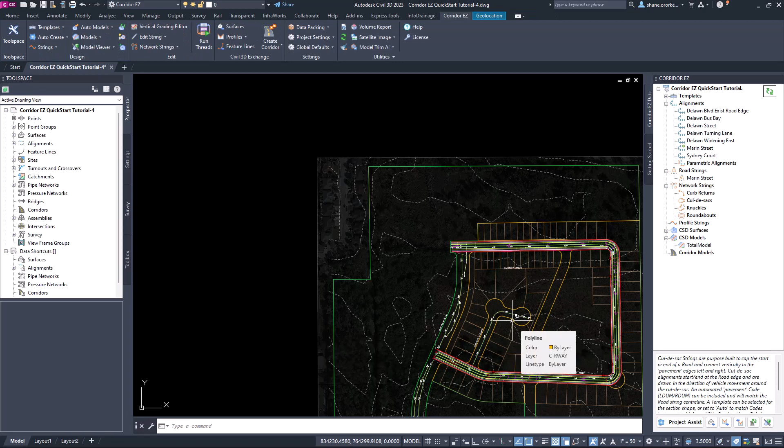From the tool space, you can create each road, curb return and other strings one at a time. You can also use the Project Assist command to intelligently assess all your alignments in the drawing, to suggest how you would like to use them in the design, and guide you through a workflow to create all of them in a single process.

To see how to create individual roads and road network objects singly, right-click on any center line and turn it into a road string. Strings behave like a single baseline corridor. The alignment drives the horizontal geometry, we create an initial best fit profile for the vertical geometry, and apply cross-sections for the design surface and volumes.

The sections initially come from your templates. All you need to do in the Create form is to select the starting template, the sample surface for daylighting and volumes, and how frequently you would like to calculate sections.

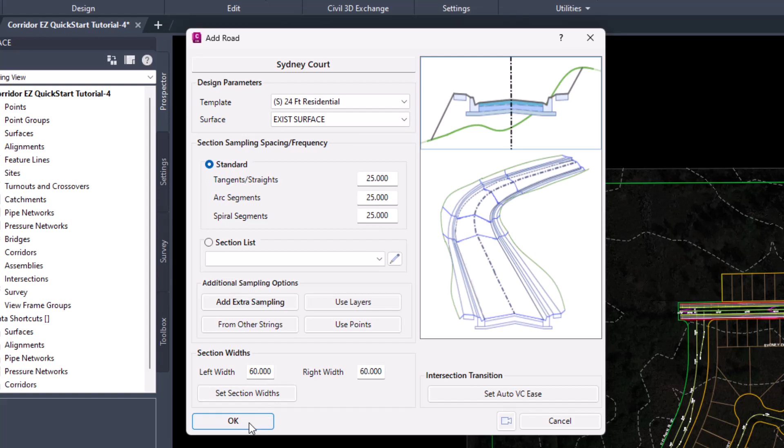Once created, a floating window displays your design profile. This window can be positioned anywhere on your monitors, so you can design your profile while you review the full AutoCAD model window. You can right-click anywhere in this window to display a cross-section at that particular station, updating dynamically as you edit the profile.

Plan line work and a surface model can be created and update as you design in this window. We'll revisit this interface and the integration with Civil 3D profiles and profile views in a following video.

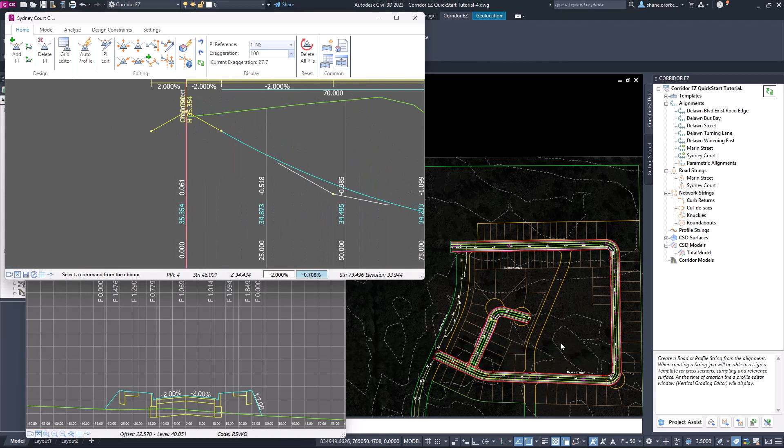You can repeat this road string creation process on a second road to form an intersection. Whether a crossroad or a T-intersection, the side road will continuously update to adopt the cross-section of the main road. To add curb returns to an intersection, simply right-click on the curb return object group in the tool space.

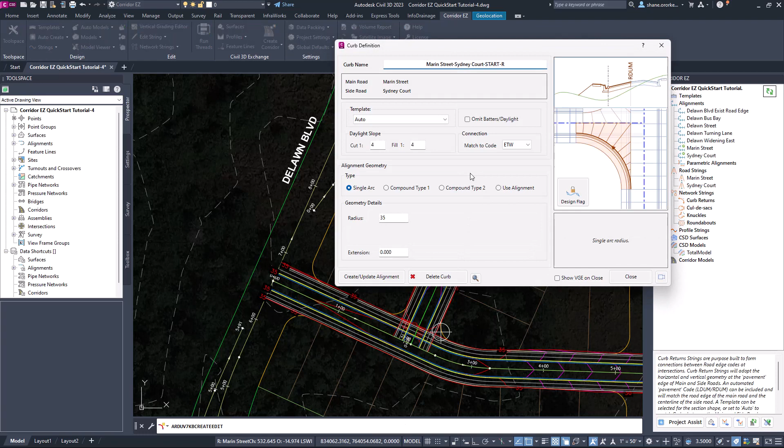You can create them individually using the Create Edit Curb Return command, or you can add them all at once using Auto Curb Returns. When creating them individually, or editing a created curb, pick an intersection quadrant, fill out the radius details and click Create. The curb return will be inserted, elevations matching start and end, and the main and side road will be trimmed. Change the radius and update to see the intersection reform.

Auto curb returns will create curb returns at all intersections with a radius that you set. Update a road elevation and all curb returns will update automatically.

After running auto curb returns, you will likely see a quick surface display in the drawing. If you want to create this surface model of the road networks at any time, simply right click on the CSD Surfaces object group and select Rebuild. This will create the surface for your road network.

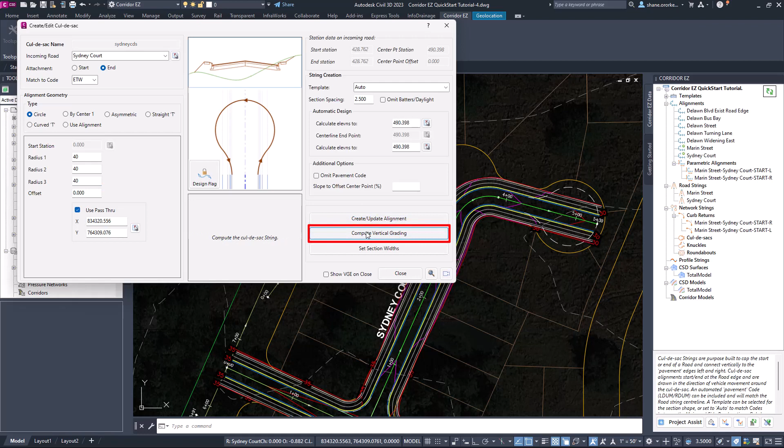Adding cul-de-sacs and knuckles works in a similar process through the tool space. To create a cul-de-sac, right click on the cul-de-sac group. You select the road to connect to for the cul-de-sac and use either your own alignment or add in values to have the software create an alignment for you. Then make it into a string. The cul-de-sac will be connected start and end, and trim the road to form a total modelled surface.

To add a knuckle, right click on the knuckle group. Again, you select a road to connect to and either use your own alignment or add in values to have the software create an alignment for you. When you make the string, you also pick a template to attach to the knuckle. When the knuckle is added, the road pavement is set to target to the knuckle, and the knuckle connects at the start and end of the road elevations.

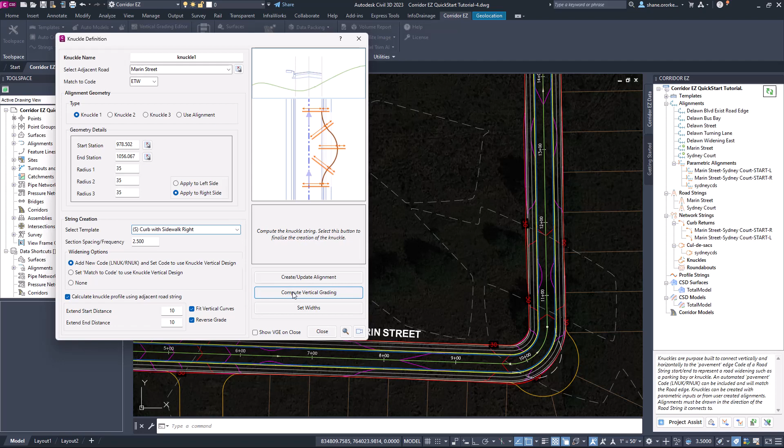After creating two roads in an intersection, you'll see you've got more alignments for more roads, and also alignments to control the road widths, and an alignment to define the edge of an existing road. To rapidly build out a network of roads, you can start the Project Assist command from the tool space.

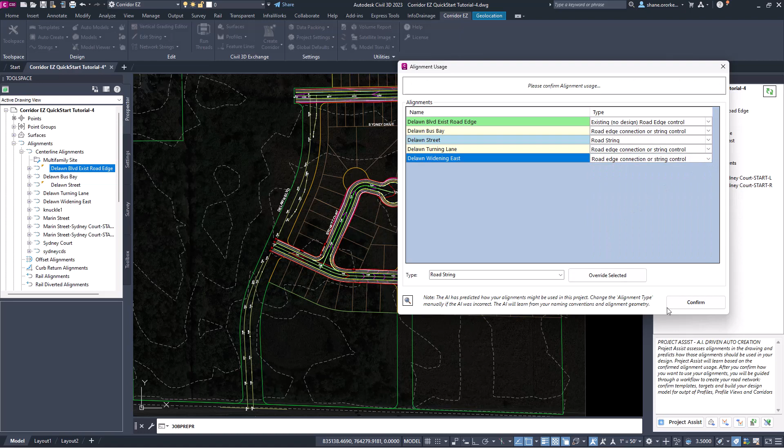This will intelligently assess your unused alignments and suggest how you might want to use them in design. It does this based on the alignment geometry and alignment name, and it will learn from your selections. You can override the suggestions for how the alignment should be used, then proceed to a workflow for creating the network.

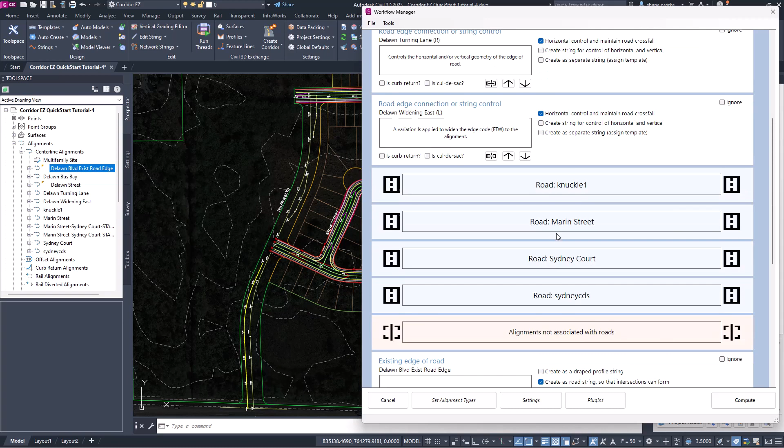In the creation workflow process, the software identifies all the road strings and then allows you to fine-tune how alignments will be used to edit the cross-sections of each road. You can tick to add cul-de-sacs to the start or end of any road. You can change the template assigned to a road, and you can pick the intersections where you would like all crowns to be maintained instead of the default of maintaining the primary road crown.

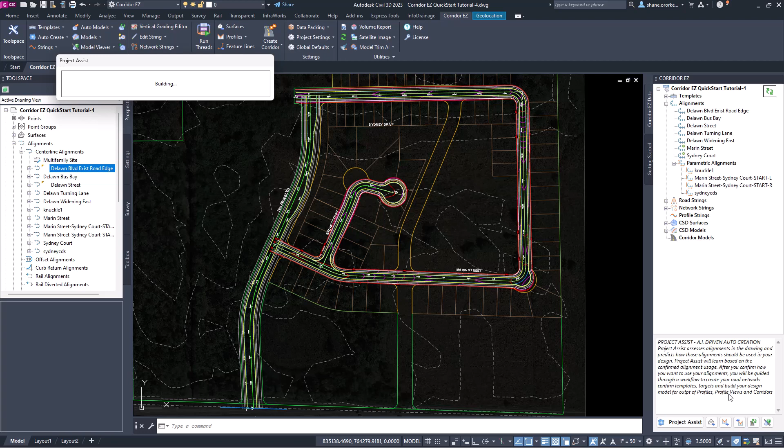Once you proceed to create, all the strings are created, intersections are added with curb returns, models and surfaces are also created. Everything is still connected, so you can continue editing your roads and expect all the side roads, curb returns, cul-de-sacs and knuckles to update. Cut your design time from hours or days down to minutes with Project Assist.